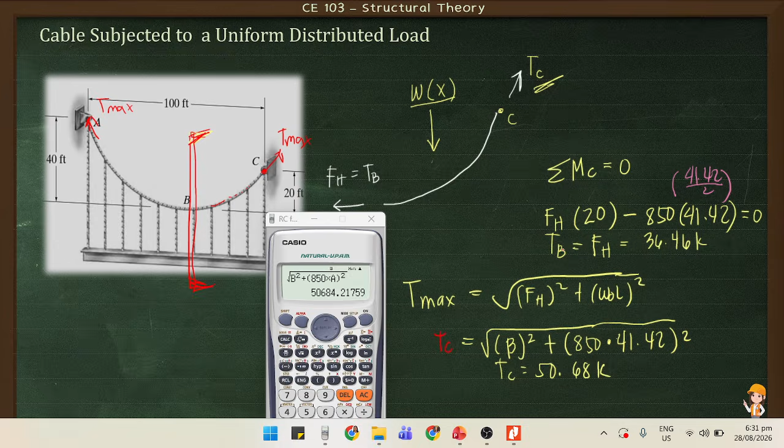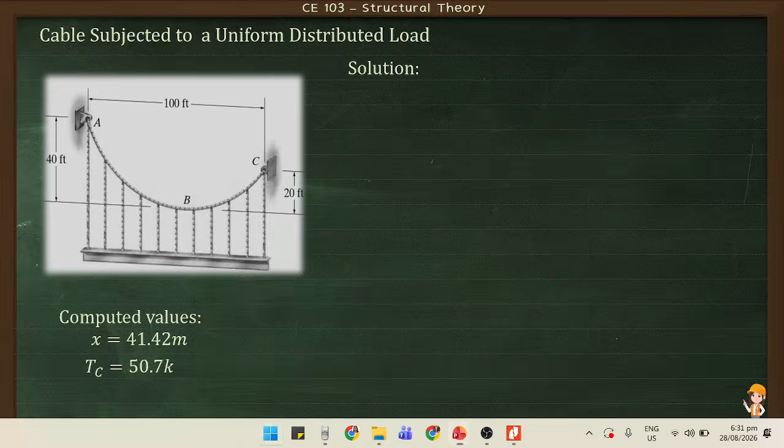This is 850 multiplied by 41.42 squared. So, input natin ulit yon dun sa ating calculator. Meron na tayong square root of alpha B squared plus 850 multiplied by A, then squared. Ibig sabihin, TC is equivalent to 50.68 kips. So, now, pag nakuha na natin yon, anong sunod? Yung computed value natin, 50.68, round off na din yan, 50.7 kilopounds.